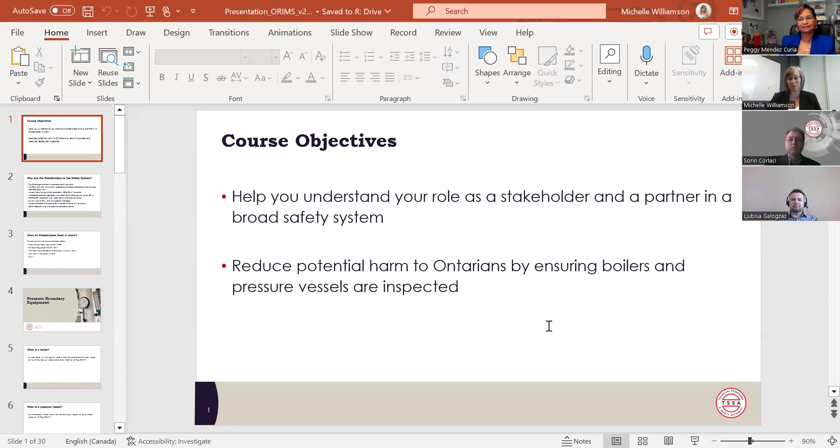Great. So today we'd like to help you understand your role as a stakeholder in a broad safety system. And in doing that, we hope to reduce potential harm to Ontarians by ensuring that boilers and pressure vessels are inspected. So I implied that you have a role to play in a broad safety system, which begs the question, who are the other stakeholders in the safety system? So there is the Ontario government. They are the ones that create the safety legislation that we must all abide by. We have TSSA, which is a private, not-for-profit public safety regulator, which is an arm's length organization from the government.

We have the insurers. I'm sure there's a couple in the room, and they offer equipment breakdown or boiler and machinery insurance. We have authorized inspection agencies who are also stakeholders in the safety system, and they inspect boilers and pressure vessels. We have certified boiler and pressure vessel inspectors who also inspect repairs and alterations of these devices. And ultimately, we have the owners, the users, the operators of boilers and pressure vessels, and their property managers. We have insurance brokers that make sure that these owners, operators, and users have adequate protections in place to fund any potential liabilities. And of course, we have the claims adjusters, who are the ones that actually go and adjudicate those claims and help to determine root cause.

So as a stakeholder, what do you really need to know? This aims to provide you with some very basic foundational information on boiler and pressure vessel equipment, also called pressure boundary equipment. We want to share with you some key highlights from Ontario Regulation 220/01, which covers boilers and pressure vessels. We're going to walk you through what TSSA as the safety regulator does to ensure the safety of boilers and pressure vessels and the people that work with them or live near them. We're going to talk a bit about your role in the safety system, and then, of course, we'll open it up for Q&A.

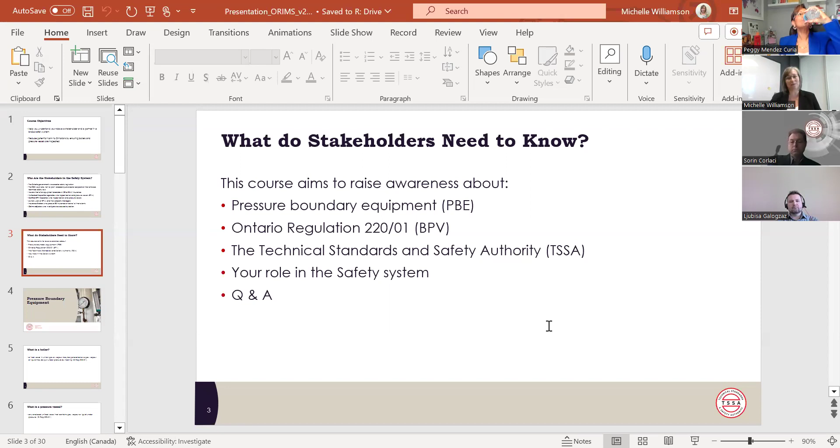So let's talk about pressure boundary equipment. A boiler, just to level set our understanding, is a fired vessel, meaning heating, in which gas or vapor may be generated, or gas or liquid may be put under pressure by heating it. Some examples could be a fire tube boiler, where hot flue gases flow inside tubes that are submerged in water within a shell. Conversely, you could have a water tube boiler where water is circulating through those tubes and hot flue gas surrounds them.

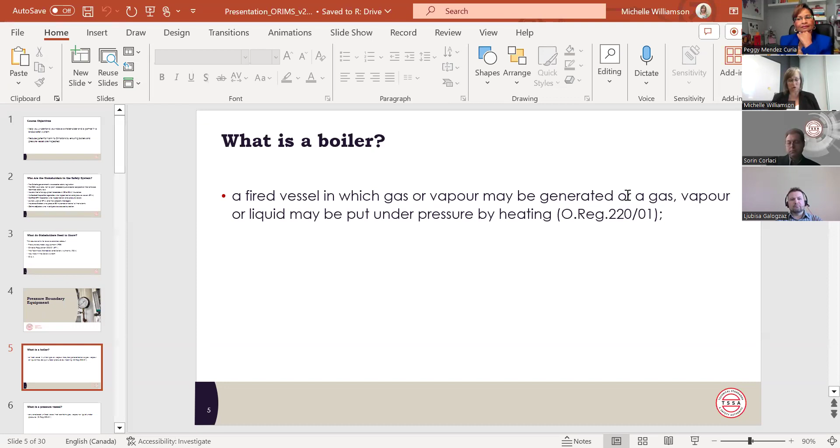So what's a pressure vessel? A pressure vessel is any enclosed, unfired vessel that contains gas, vapor, or liquid. And everything in that vessel itself is under pressure. If you think of a very small example, a fire extinguisher is a pressure vessel. Some other examples are autoclaves. These are the pieces of equipment in hospitals that sterilize surgical equipment, compressed air receivers, as well as heat exchangers.

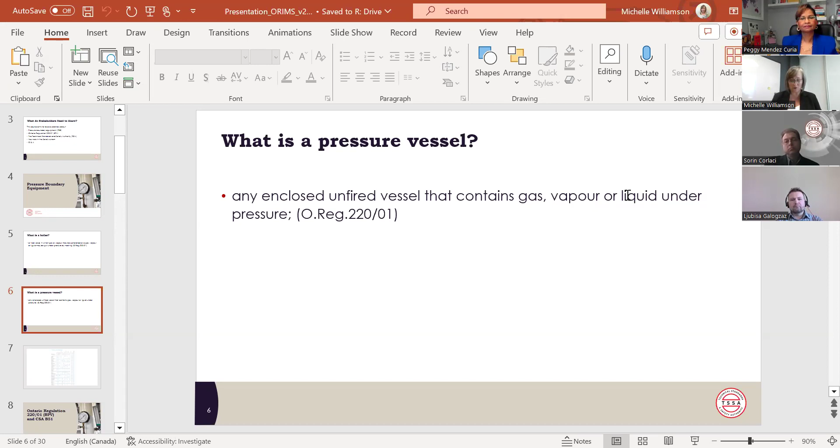So for the brokers in the room, consider how many of your clients operate one of these types of buildings. Do you know how many pieces of pressure boundary equipment they have? Do you know if it's licensed? Do you know if they're compliant with provincial laws? And the risk managers, do you know? When you're sourcing your property policies or your EBM policies, do you know how many boilers you've got in your facilities and if they're licensed and regularly inspected?

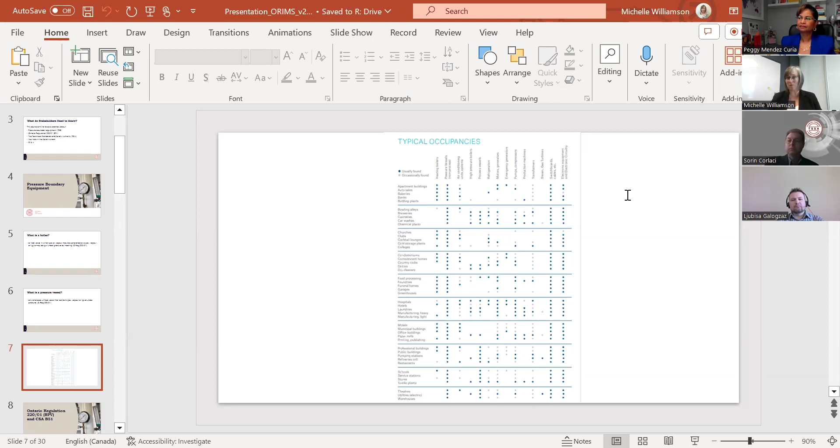So I'm now going to hand things over to my colleague Sorin, and he's going to share with you some information about Ontario Regulation 220/01, as well as the Canadian Standards Association Code B51.

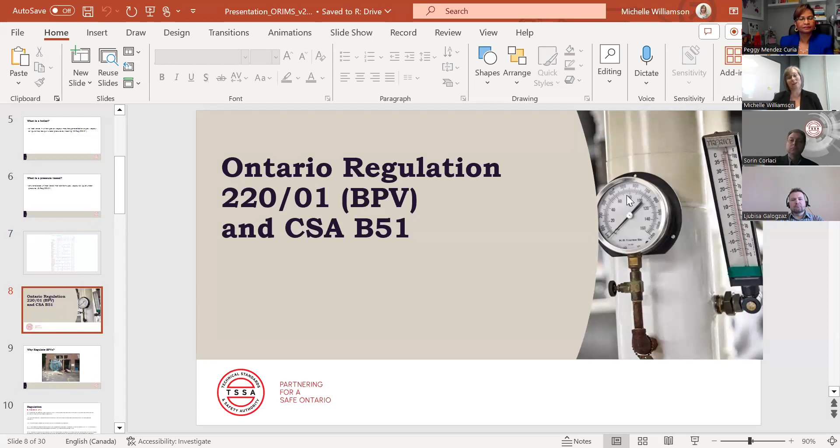Michelle, please move forward. Yep, can you hear me?

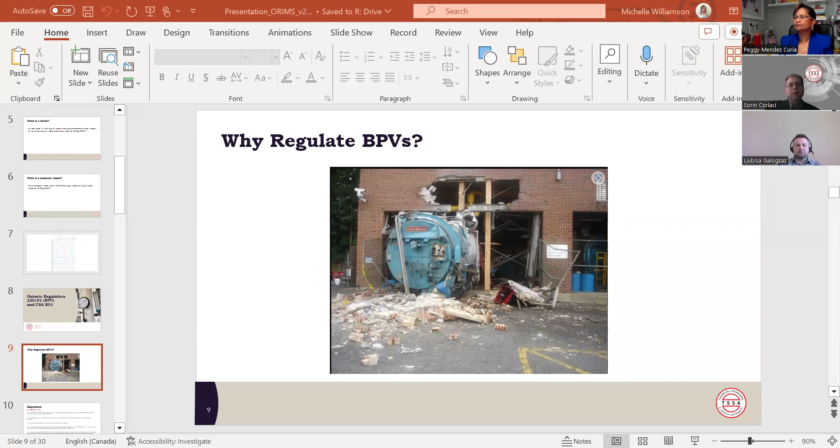Yes. So what we're trying to emphasize here is to give you a little bit of information that you can use in your endeavors, day in and out, to make sure that we're all on the same page. And this regulation, Regulation 220/01, is our governing regulation, as Michelle stated, given to us by the government of Ontario, for us to ensure that it is followed and things are being kept safe.

So I put together some excerpts that will give you the basic information of why it's important to conduct inspections, and why it's important that nobody is operating any of these devices, be it a boiler, a pressure vessel or piping, if it is not certified by the director. By the director, we're talking about the TSSA director, who has the powers given by this regulation, and together with the inspectors provides this safe environment for everything operated in the province of Ontario from the perspective of boilers and pressure vessels.

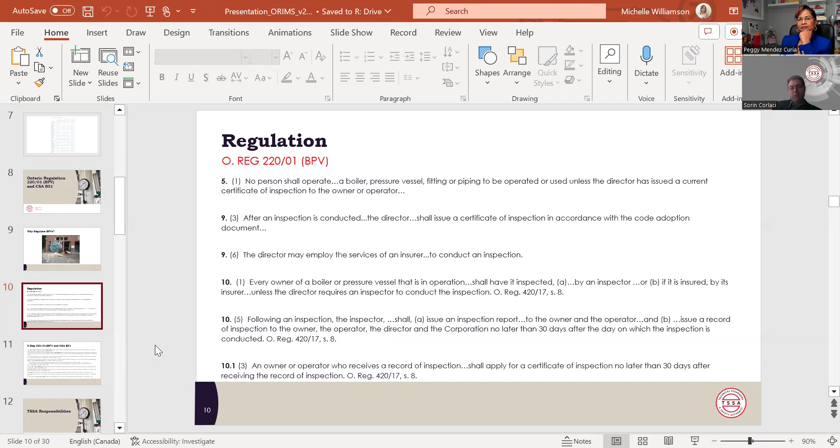Now, other excerpts from the Ontario regulation, together with Canadian standard B51 that handles boilers, pressure vessels, and piping, reflect specific requirements, again, in our efforts to keep everyone safe. So TSSA is actually coordinating this effort from the beginning, starting with the design of boilers, pressure vessels and piping, continuing with the fabrication of those items, and further on with the installation, and completing it with inspection of those newly installed boilers or pressure vessels, continuing after that year after year with so-called jurisdictional inspections or periodic inspections.

So all these paragraphs put on the screen here for you are there to reflect the controls in place to ensure those requirements are being met. One important piece of equipment to every boiler or pressure vessel is the ultimate thing that will keep that device safe, and that is something we call a pressure relief device. That is, as I said, the last resort in case everything goes wrong. That specific item should still be protected, and if the pressure starts building in that item, that safety relief valve would be the one that will relieve the pressure to prevent an explosion from happening, as you can remember from the first slide with that boiler coming out of the building.

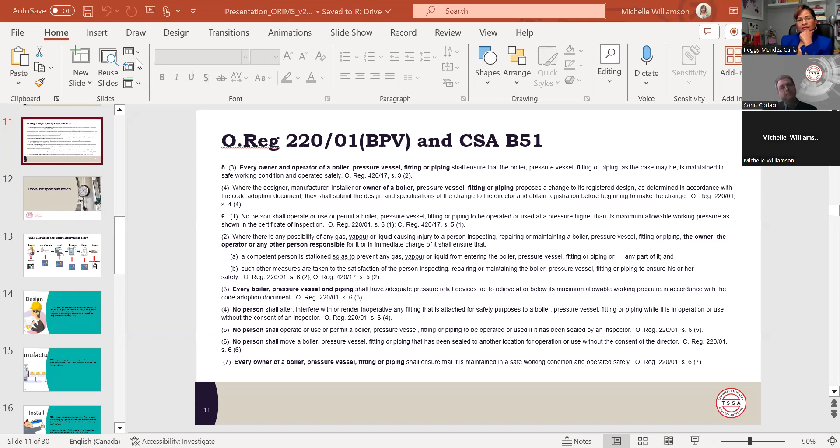Thanks, Sorin. So we're going to take you through TSSA's responsibilities as a safety regulator as a way to further expand on some of the points that we want to highlight in the Ontario Regulation 220/01. So as Sorin mentioned, TSSA regulates the entire life cycle of a boiler or pressure vessel. So right from when it is a concept, a blueprint, an idea, a drawing on a piece of paper or in AutoCAD, TSSA is involved to make sure that that design of the boiler or pressure vessel meets all codes and standards. We also participate in the manufacture, the installation, operation, repair, and the decommissioning of those devices. So let's take a little bit of a deeper dive.

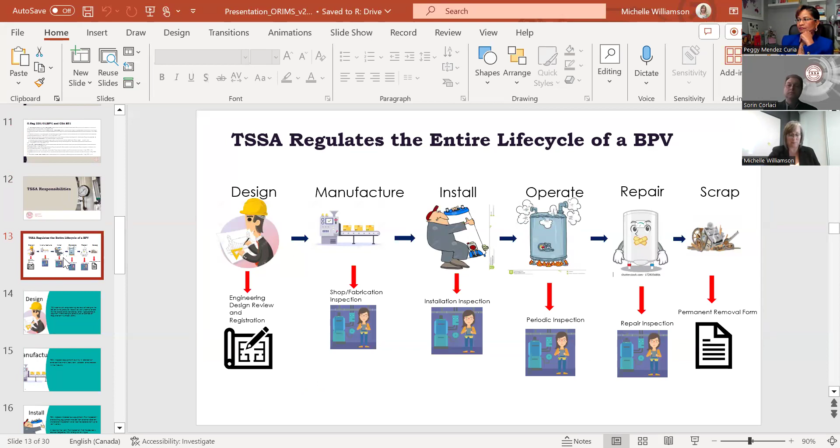So, design. As I mentioned, we have an entire staff of engineers who review those AutoCAD drawings of designs to make sure that boilers, pressure vessels, the related piping systems, as well as fittings, which are all those elbow joints and valves, meet safety codes and standards. And that could be the Canadian codes or it could be the US codes.

We also participate in the review of manufacturing facilities. So the thing about a boiler or pressure vessel is it's kind of like a furnace or a widget where you have one design, but you produce many. It's a one-to-many relationship. And so once these designs are approved, manufacturers get to work on producing them en masse. And so we will actually go out to those manufacturers and do what's called a shop inspection. And that's to make sure that these are being built as per the design, and that they haven't made any modifications to it after it was approved.

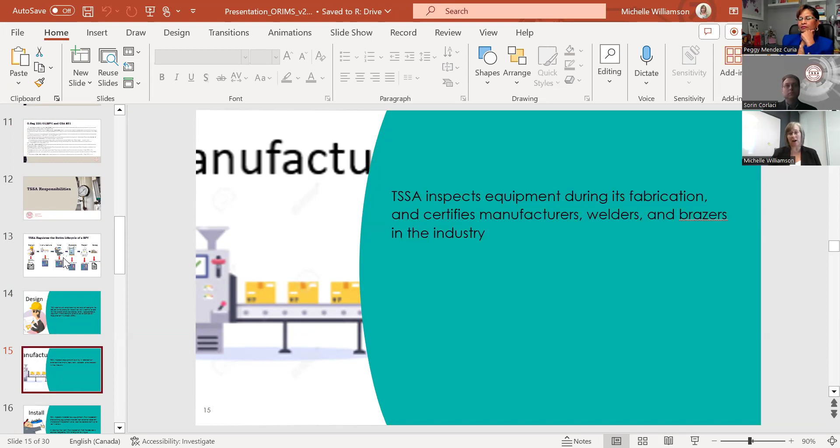We also inspect boilers and pressure vessels upon first installation. So this is to make sure that new equipment is reviewed before it's actually turned on. We want to make sure that it was built and installed to code. And this goes for used equipment as well. So an installation inspection is anytime that particular device is installed.

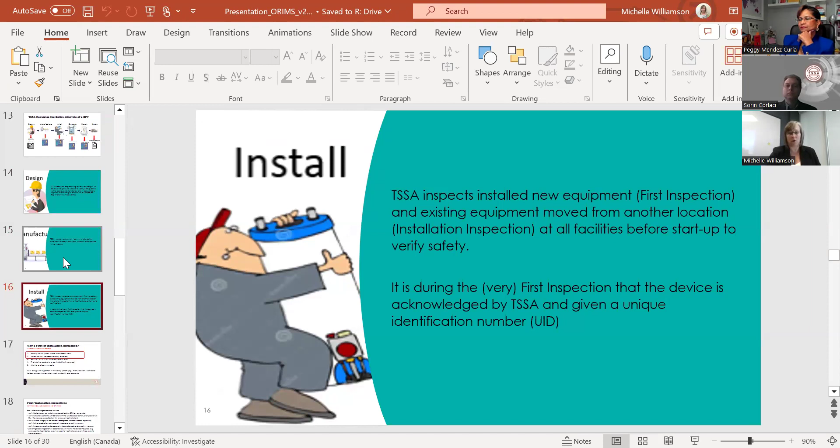So if you think of a manufacturing facility or a hospital or even a school, if you're taking one boiler offline to do some maintenance, before you turn it on, you need to have a new installation inspection because it came off of your system to provide heat or whatever it was doing for you, and it's now being brought online again. And so we do those very first initial installation inspections. So why do we do that? Why is it important?

This is the Risk and Insurance Management Society. You are all risk managers. Many of you are certified in risk management and are likely very familiar with the risk management process, which is identify the risk, assess the risk that it poses, try and control the risk in some way, shape, or form, finance any residual risk, and then continuously monitor, improve, and communicate.

And so that first, or that installation inspection, helps us to identify the risk. So what is it? Is it a boiler? Is it a pressure vessel? How big is it? What's inside of it? What's around it? Where is it? Is it next to a hospital or a senior's residence? How does it work? Is it using flue gases or is it generating steam?

We also want to assess the risk. So when we go out, we take a look at that brand new boiler that's being installed for the first time before it's being turned on. Based on its design, based on history of accidents or claims, what's the likelihood that this is going to go bump in the night? How bad could it be? Are we going to have the boiler shooting through the side of the building, like the picture that Sorin showed us? Or could it be even worse? And how long could that disruption or how long could that devastation last?

So we use the risk management process to drive our internal processes to ensure that all of these devices are safe. So TSSA, along with its safety partners, which are the owners, the insurers, the installing contractors, we all work together to identify and assess risk.

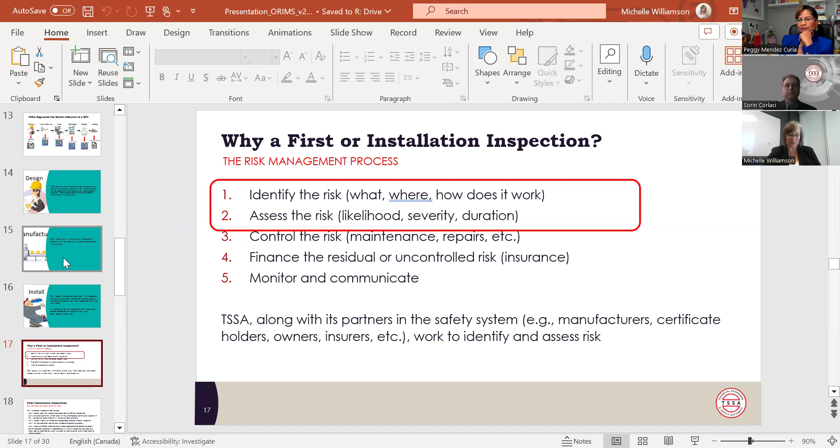So as mentioned, we do a first inspection, and this could include verifying that the boiler or pressure vessel has an approved design. So every time an engineering design, a drawing for a new boiler or pressure vessel is approved by TSSA, we give it something called a CRN, which is a Canadian registration number. And that CRN must be stamped on a metal plate and placed on the boiler. If the boiler does not have a plate, or the plate doesn't reference the CRN, it's in non-compliance. You need to reach out to the manufacturer, get a new plate, and get the CRN stamped on it.

During our first inspection, we also verify that that installation conforms with our code. So the B51 code that Sorin referred to, or the American code, the American Society of Mechanical Engineers, the Code of Construction, for pressure vessels. We also want to verify the overall integrity of the device and make sure that it's acceptable from an internal and external inspection. So key to note here, there's two different types of inspections when looking at a boiler.

There's the internal inspection, which is actually going inside the device, which means you need to unplug it, turn it off, disconnect it from its related systems, and take a look at it. That requires shutdown of equipment. And so facilities really need to coordinate with their insurers or TSSA to ensure that they're doing it at a time when maybe your plant is shut down for perhaps summer or Christmas break, or that it's at a low productivity time for you.

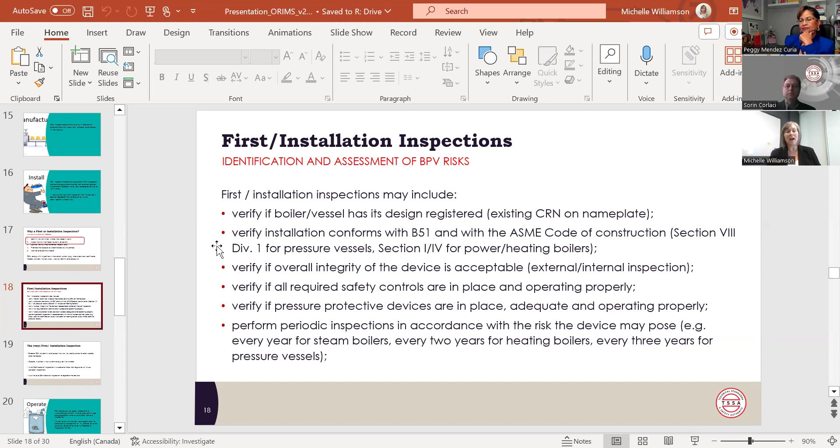We also perform periodic inspections. So after a brand new device or a used device is installed and turned back on for the first time, we will then come out periodically to inspect those devices to make sure that they continue to be maintained in a safe manner, which is required by the regulation, and to make sure that everything is still compliant.

So this really enables us to identify and assess the risk with those boilers, pressure vessels, fittings, and piping systems. It also allows us to track. It creates inventory in our system. And what I mean by that is the very first step in the risk management process is identify the risk. And insurers do this best.

Every year you fill out insurance application forms, surveys. Those are ways to actually gather data about what's being insured, about what is the risk. And so our first inspection serves the same purpose. It allows us to gather information about a potential risk and then create data in our system. We call it inventory, we give it a number, and we can now track that piece of equipment through its lifetime.

Also through that process, as Sorin mentioned, is we issue a certificate of inspection. This is also a legal requirement stated in the regulation. You must have a certificate of inspection evidencing that the device was inspected and that it is safe to operate. Without it, owners, users, operators are not compliant with the law.

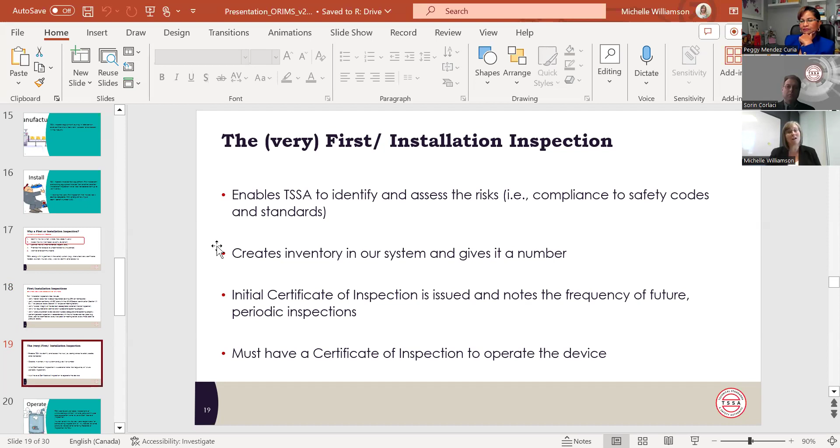So you've got a device, it has a nameplate on it. Stamped on that nameplate is the CRN number. You've had your first inspection, you've turned it on, and you're running your business. While you are operating this device, we need to go out and make sure that it's safe. And by we, I mean stakeholders in the safety system, not just TSSA. The majority of inspections of boilers and pressure vessels are actually done by insurance companies, not TSSA. And that too is in the regulation.

So where a boiler or pressure vessel is covered by a policy of insurance, the insurance company is legally responsible to do those periodic inspections. It's only the first inspections and inspections of uninsured equipment that TSSA takes on. So you'll see that this is one area where TSSA as the safety regulator needs to work really collaboratively with the insurance companies to make sure that there are no gaps in our safety system.

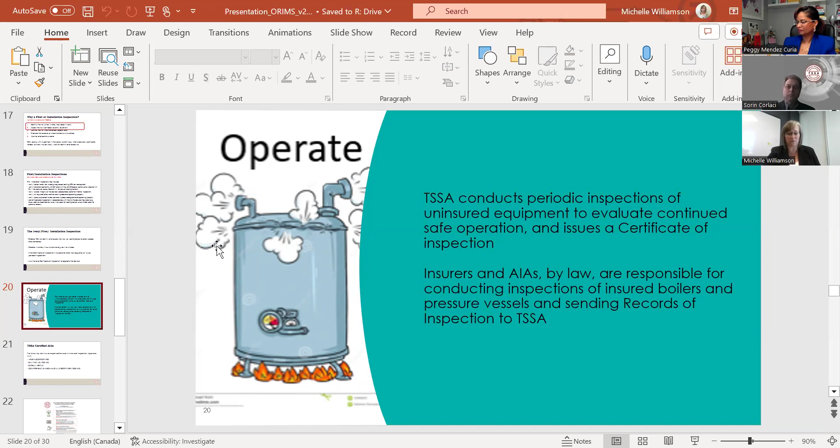Now, I'd mentioned earlier that you need to operate your device and ensure that it has a certificate of inspection. So in terms of what you need to do, an owner, user, property manager, operator of a boiler and pressure vessel, they need to arrange to have it inspected. So if it's insured, they're going to reach out to their insurance company. If it's uninsured equipment, they need to reach out to TSSA. And so you need either the insurer or TSSA coming out on site to inspect your equipment. And there are defined frequencies in the code. Certain devices are inspected every year, like a high pressure boiler, and other devices every 3 years, like pressure vessels.

So once you've had your inspection completed, your insurance company's got 30 days to submit that inspection report to the owner operator and TSSA, and that is outlined in the regulation. Actually, it's in our code adoption document. Once that inspection report is received, then TSSA validates all of the information. The owner also validates the information. They confirm that, yes, such and such insurance company came out on site. They inspected these pieces of equipment, all passed. They issued these recommendations. Yes, this record of inspection is accurate. So your owners, your clients, your insureds are reviewing your records of inspection for accuracy.

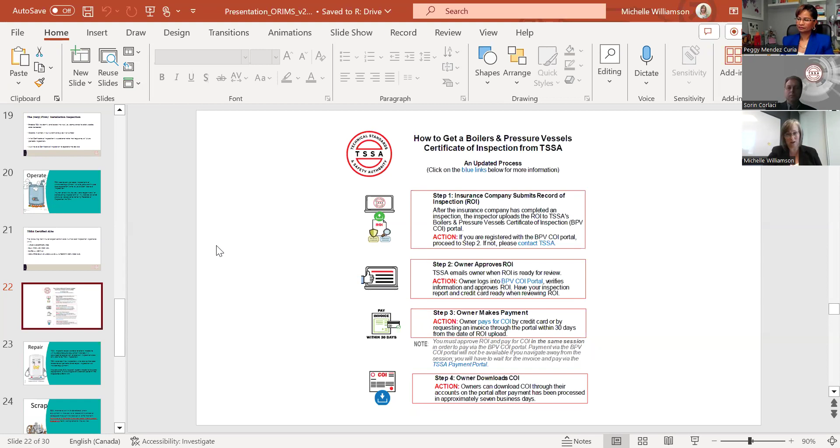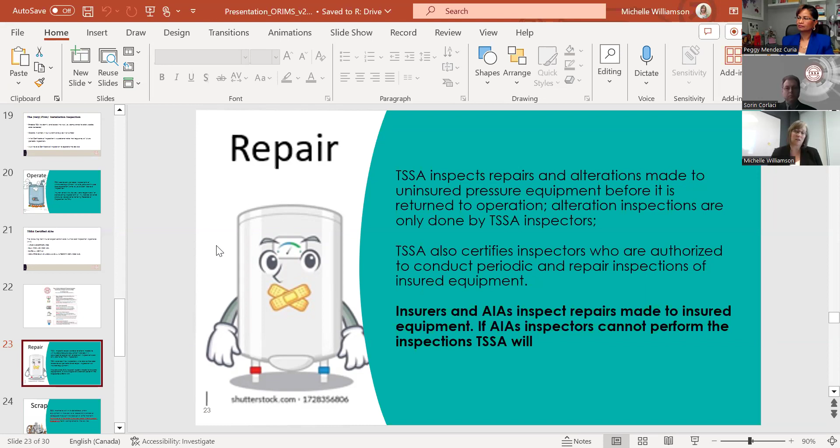So that's inspection. But your device is now 10 years old, let's say, and it needs some repair or alteration. TSSA and the insurers also inspect repairs and alterations made to pressurized equipment, and this is done before it's actually returned to service. The authorized inspection agencies can also perform these repair inspections, but authorized inspectors cannot perform inspections on behalf of TSSA. They can only perform on behalf of insurers.

And much like everything in life, there is a termination or expiry date. Boilers and pressure vessels don't live forever. And so when equipment comes to the natural end of its shelf life, or its life cycle, we also memorialize that in our database. So during that first inspection, we create inventory in our system. We then decommission that inventory. So we keep it for historical purposes, for data analysis, but we decommission it to know that it is no longer operating.

If it is turned back on, if someone buys the used equipment and they think I can get a few more years out of this, that's when it needs another first inspection. So every time you physically turn it off, disconnect it from your systems and turn it back on, you must call TSSA for a first or installation inspection. And again, that's covered by the regulation. But if you are scrapping it and it's going to a metal yard, there is a form on our website called the Removal of a Boiler or Pressure Vessel from Operation or Use form. And that lets us know that we can decommission our inventory.

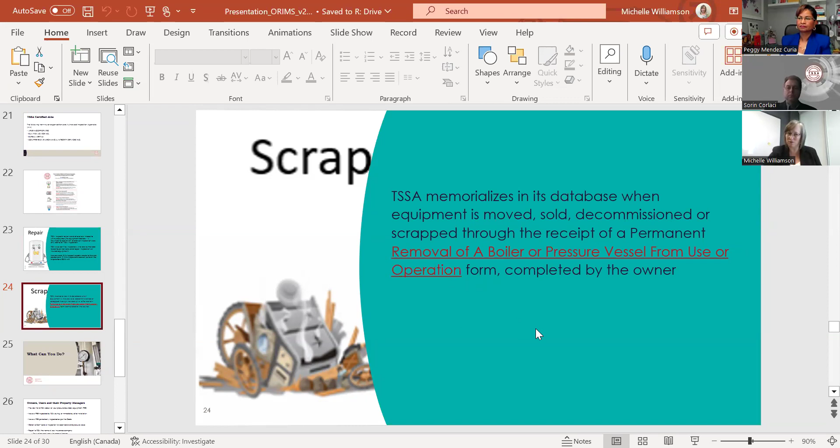So all of that information, what does this mean to you? What can you do? As an owner, a user, or a property manager, you can provide information to TSSA about your pressure boundary equipment. And it's not just you can provide, thou shalt provide, as required by the regulation. You must let TSSA know when you have new equipment. These things can explode and can cause catastrophic impacts, so it's very important that we know where these risks are. It's very important that you have all of your pressure boundary equipment inspected by TSSA during or immediately after the installation of any equipment and before it gets turned on.

Make sure that you continue to have that equipment periodically inspected as per the code, and make sure that you're obtaining a certificate of inspection for each and every boiler and pressure vessel that you're operating. And on our website, via our portal, please report the name of your insurance company so that we can work collaboratively with them to make sure that we're on the same page in terms of what equipment you have, what's been inspected, and what still needs to be inspected. And please note that we're asking for the name of the insurer. Oftentimes we find that owners of boilers and pressure vessels confuse it with the name of their insurance broker. So we really want to know who's underwriting the risk.

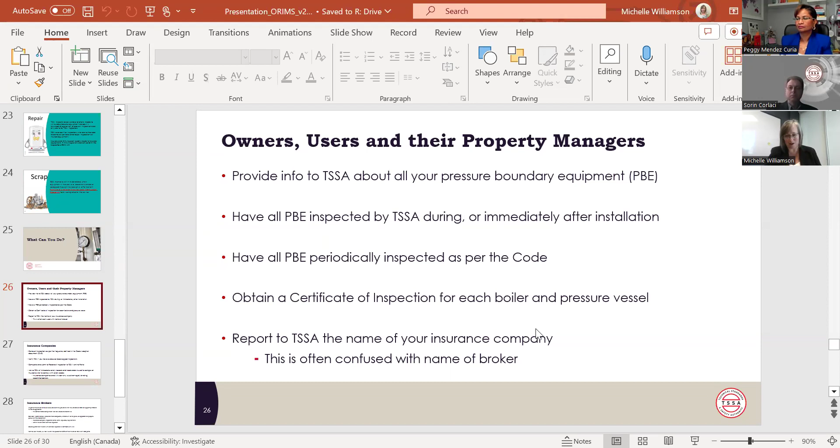For the insurers in the room, please continue to conduct your inspections as per the frequencies defined in the code adoption documents. Let us know if you have any overdue or backlogged inspections. We'll work with you. Make sure to complete and submit all records of inspection to our online BPV COI portal. And make sure that you advise us of any safety hazards where you need TSSA to issue orders to compel one of your insureds and owners to comply with safety codes.

It's important to note that insurance companies don't have the same powers as TSSA when it comes to enforcing the law. Insurance companies can make recommendations, they can encourage, but they can't mandate. And so we need to work collaboratively. The insurance companies need to let us know where they have concerns about one of their clients so that we can issue orders and compel them to comply and be safe.

Insurance brokers: consider perhaps, as part of the annual renewal cycle, asking your clients for a list of all of their equipment. You simply ask for the UIDs, we call it unique identification number, that's that inventory, or ask for copies of the certificates of inspection. That could potentially be supporting material for an equipment breakdown application. It certainly demonstrates that the owner-user is compliant, and maybe they might be viewed as a better risk.

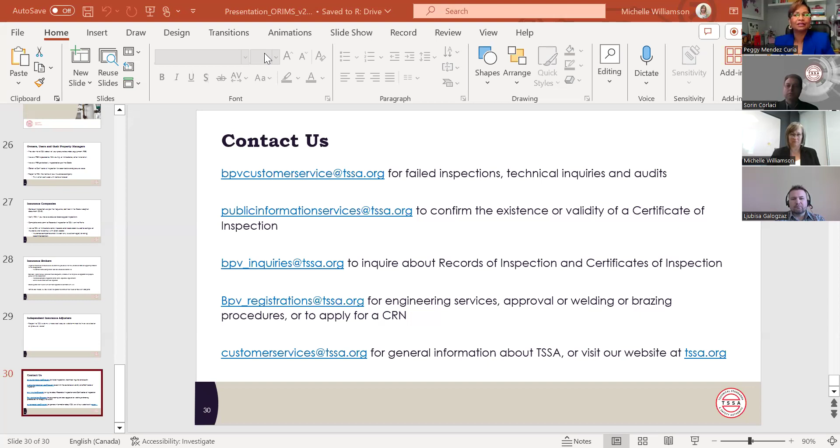There's a question from Ishmael, and Ishmael wants to know: many facilities that he has inspected with small to medium-sized heating boilers don't have a boiler man, and water tests are done just monthly by their chemical suppliers. They don't test water daily, and neither other safety tests. Do you think this is acceptable?

So I'll try to answer this one, Michelle. Sure, okay. It all depends. Fortunately or unfortunately, not everything is black and white. So in order to give a proper answer, we need to assess the situation. There are all sorts of types of boilers, different environments, different services. So in order to properly answer, we really need to look into the details, which are quite important. So until you have something specific, we will need to defer to more information. So it is possible to be acceptable. It is possible not to be acceptable, but it all depends on what exactly we are talking about.

Very good. Thank you so much, Sorin. We do have another question that's come in by an anonymous attendee. If a specialist or an engineer conducting either a building appraisal or a routine inspection for insurance purposes comments on the age of the boiler having reached or nearing its life expectancy, is there a process thereafter, and who determines that the boiler needs to be shut down?